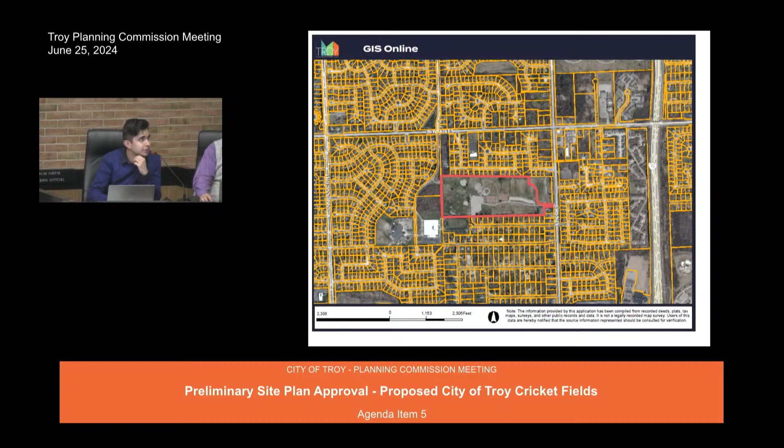All right, so the project is a proposed cricket field in the northwest corner of Boulan Park. As cited before, it's a 47-acre site, zoned CF Community Facilities, which is permitted by right for public parks.

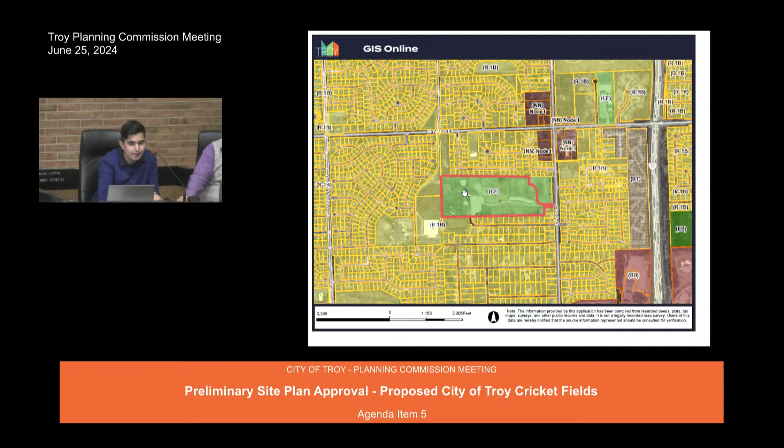The project includes replacing existing ball fields, a new steel storage shed, team benches, upgraded conduits, irrigation piping, approach sidewalks, and parking lot improvements within the Northfield Parkway, which is just outside the boundary of the park to the northwest, along with a hot mix asphalt 8-foot walking path on an existing gravel path, 10-foot offset from the proposed cricket field.

Which is, if you go to the next slide, yeah. So you can see there's an existing path that encircles the entire park, but there's going to be a separate walking path, shown on the next slide, that is 10-foot offset from the actual 500-foot diameter field.

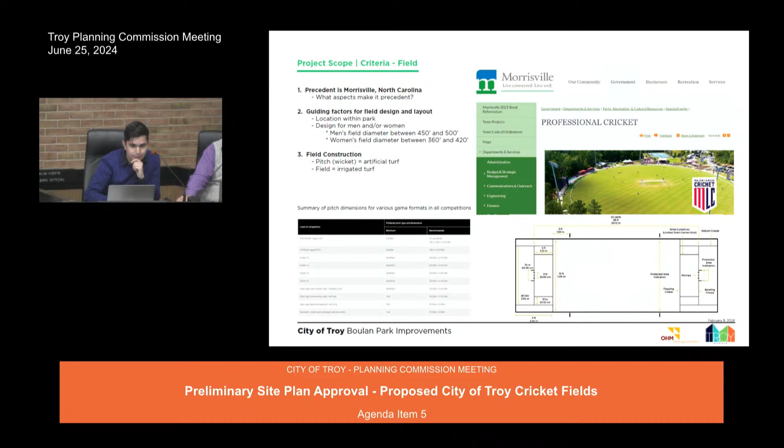There's proposed improvements to the existing utilities to expand on the amenities for this site in the future, including signage, scoreboards, spectator seating, netting, practice pitches, lighting, and broadcasting.

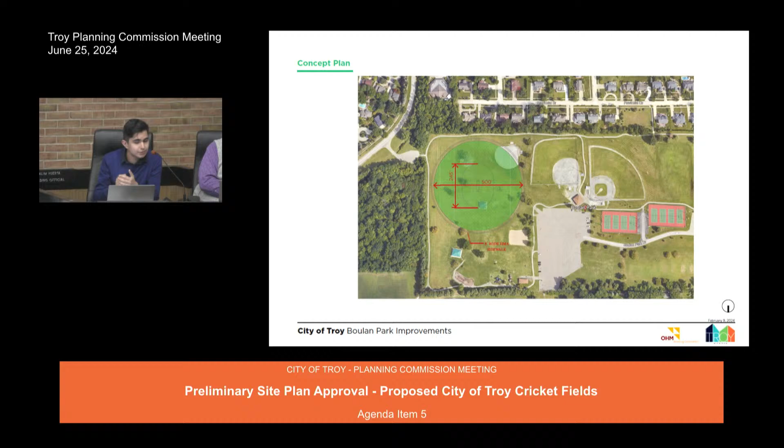And there's an existing pavilion, grill, and water fountain at the south end—if you see that blue square within the green circle—that's going to be relocated. We don't know the proposed relocation site for those facilities. The existing visitor parking within the site is to remain unchanged, but as stated earlier, the approach sidewalk will be connected to the field.

City staff has obtained funding for this project, a $900,000 grant included in the State of Michigan's budget, and city staff has done everything to begin receiving that funding.

This project received input from the Cricket community as well as the advisory board through the Public Works Department, and has been modeled off of a reference field from Morrisville, North Carolina, to ensure that it's certified through the International Cricket Council and can host international tournaments.

The proposed plans that are part of the presentation were a preliminary design by OHM and offer some more details in terms of soil erosion, design of the turf, which is going to be a hybrid pitch, and the improvements to the utilities for future amenity expansion.

Thank you. Does anyone have any questions for JR? Ms. Malalahalli? Brent or Salim, can you tell me what I see at the bottom of the slide here? What are those? I see a brown rectangle, and I see something to the left. What are those, do you know?

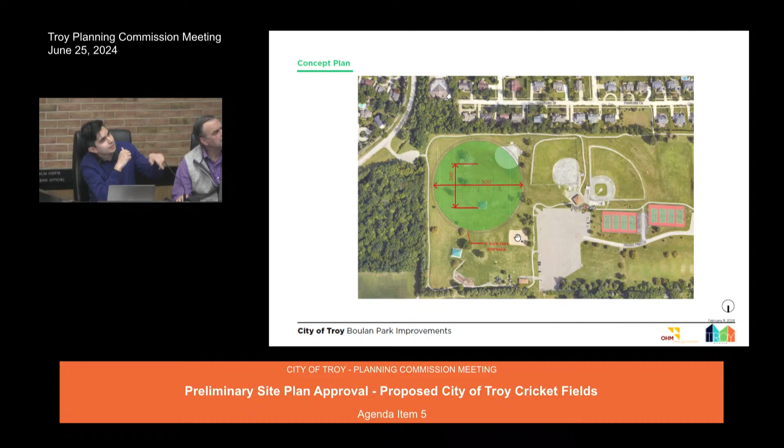You mean at the bottom west end of the existing parking, bottom center? Is it a gray rectangle or brown rectangle? That's the sand volleyball. Below that? Those are restrooms, okay.

My second question is, of course, we don't know where the pavilions are going to be relocated, that for sure. But in terms of the existing parking lot, how many cars does it hold, do we know?

Good evening, commissioners. The parking lot has about, I think, approximately 240 parking spots currently out there. We do have the ability to open up some overflow parking on the grass, and we just recently did that for a Touch a Truck event. So it's not uncommon when there's multiple events going on in the park that we have staff who actually direct and help people park on the lawn area, where we're used to doing that for trainings.

Because I know there is a proposal to also increase the parking lot on the gravel area. Correct, part of the preliminary site plan includes the improvement of the gravel parking lot off of Northfield Parkway. However, that is not going to be constructed at the same time as the cricket pitch. We don't believe the funding's there for that, so we'll look at doing that with capital dollars down the road. But since we're bringing the project before you, we wanted to at least include the parking lot for a future date, hopefully constructed when funds become available.

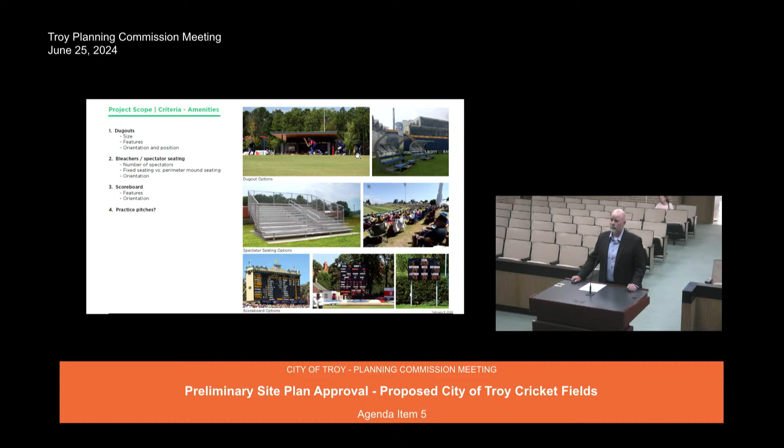Go ahead, Mr. Buechner. Can you speak to the $900,000? What does that include or not include? Sure. Our state representative, Sharon MacDonell, was able to get the state budget appropriations committee to appropriate $900,000 to a cricket field.

That's all the requirements. Interestingly, we don't have to go through any environmental study. It's not federal funding, it's state funding, so there's not a lot of strings attached, so to speak.

That $900,000 is paying for the current design efforts through OHM. And then we'll have approximately $650,000 to $700,000 after all those fees are paid to put towards construction.

We are very conscious, especially engaging the cricket community, having a youth coach on the committee through the design process along with an adult player, that sometimes we had to rein them in a little bit. We would love to irrigate the entire field, but it's not in the budget, so the inner circle is the only thing being irrigated.

They would love to have lights. It's not in the budget. However, these can all be added at a later time. So we're really trying to produce a product that is close to that available funding as possible, not using city capital funds to subsidize any of it.

Gotcha, cool, couple other questions. So parking, 240, is that enough? Typically, again, losing the shelter and going down to one shelter right now, those hold 250 guests themselves, so going down to one shelter will help. Taking away one baseball field will help too.

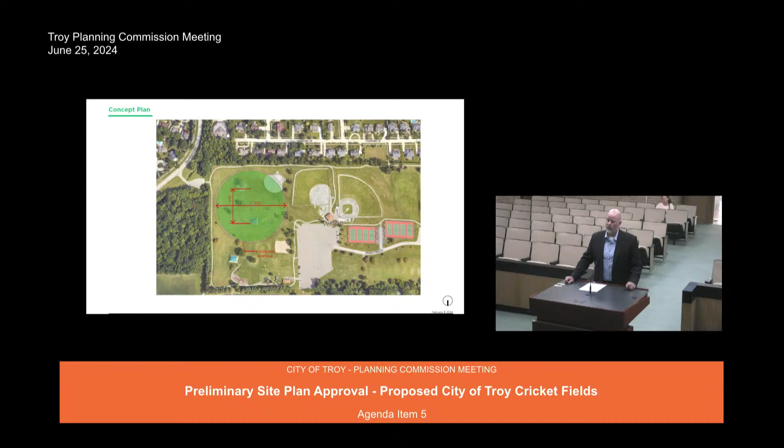So that area, that elliptical 240-foot area, is the inner circle. That area is what's going to be irrigated. The pitch is what's directly in the middle, and that's going to be the hybrid area. I think we're only going to be maybe the third in the country to have this style of clay combined with synthetic turf. I actually have to purchase a very specific type of roller to be able to maintain it. So that's the area that's going to be the synthetic or hybrid, the pitch itself.

So let me ask, while we're talking about this: that 240-foot oblong circle is going to be natural grass, that's irrigated, with a sprinkler system? That is correct. And the outside, up to 500 feet out, is that natural grass that's not irrigated? Correct. Because right now Boulan Park is not irrigated? It is. The baseball field that we're replacing is not irrigated, but the other two baseball fields are irrigated, and the soccer fields are irrigated as well.

Right, but what about the area above the playground, north of the playground and the pavilion area? Is that not irrigated? That is not irrigated either. Okay, and the current space is not irrigated, so this would be an upgrade? That is correct.

I live walking distance to this park. I'm there multiple times a week, and my family uses everything: tennis, pickleball, soccer, the playground. We go to the concerts, we go to Troy Days, we use the pavilion for all sorts of school events. We're there all the time. So my biggest question is...

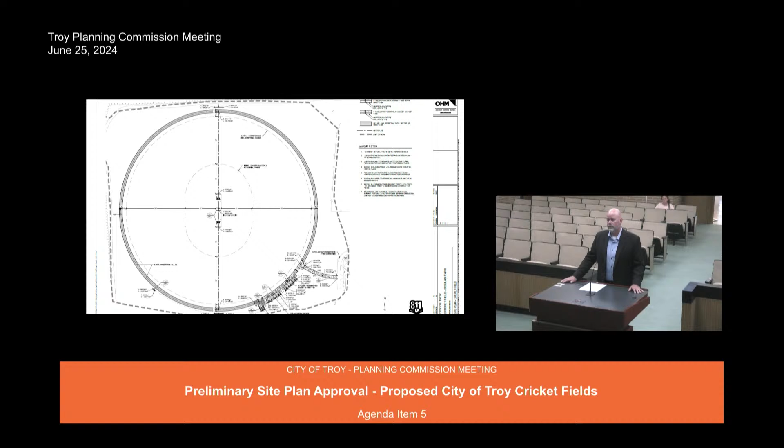Okay, and it actually works out well because there's that path right from the parking lot, so people can walk straight there. In terms of a safety issue, I don't know much about cricket. In terms of the ball, I know it's heavier, but is it oriented a certain way where people walking around the outside path that circles the whole park... I get that we have baseball fields and when there's a game you have to be aware, but how dangerous is it, and are we making it large enough to make sure people aren't going to get hit?

Yep, there can be errant balls, just as in baseball. Some of your adult players will be able to hit it out of that 500-foot radius. Again, that's the idea of the asphalt pathway, to tell people you're entering a new space. A lot of times they'll also put rope on sticks, just if it's an adult game and they want to play extra cautious, to delineate the field and so people recognize you're coming into an area where recreation is being played and you should be cautious.

Okay, I did want to comment on the parking lot. I understand it's not going to be part of this phase, but it looks to me like there's going to be a clearing. Could you go to the one right before real quick? Yeah, okay, so that dark space above the gravel lot is currently trees. So I imagine there'd be a tree inventory done, to make sure what's being cleared out is appropriate and all that? Yes. Okay.

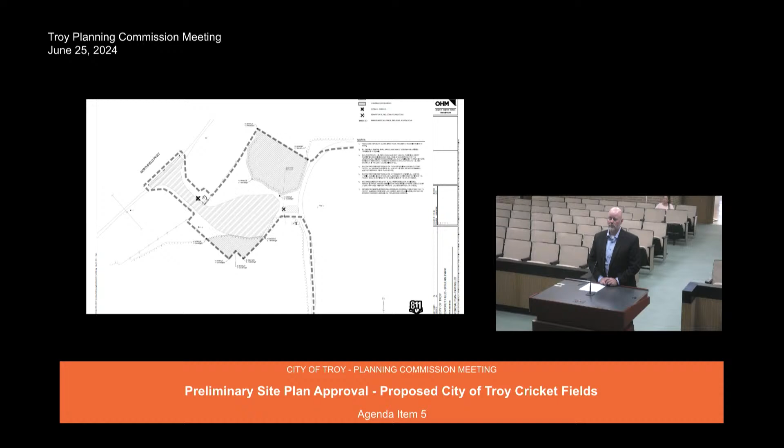And also, right now, as you know, it's a very private drive, that gravel area that comes, and when you're driving by Northfield Parkway, I would imagine many people don't even notice it's there. So I would be careful that we don't just clear out this huge space and you drive by and it's an empty parking lot all the time. Right now there's that chain link fence with green on it, but whatever you do, I would hope it would be done in a way to keep it protected from Northfield Parkway and the neighbors behind.

And then the biggest comment about the parking lot - I don't know if we're approving this plan for the parking lot right now, because if we are, I do want to make sure we mention that the majority of people entering Boulan Park from that west side are pedestrians. They're not driving into that parking lot. Almost everyone walks in with their dog or family or bike or whatever.

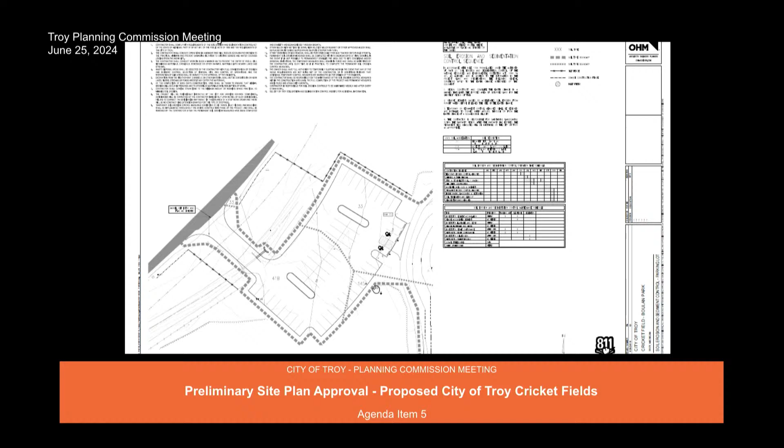So the plan, JR, could you go to the next slide real quick? The plan that is being proposed provides no pedestrian path whatsoever. We don't want people walking into a parking lot to come into the park. There has to be - and I imagine it would make most sense, it's kind of a weird angle - but on that southern side, a nice 8-foot path that would invite pedestrians to come in, because right now they're just walking in that gravel. It would be nice to have a proper pedestrian pathway, and you've got to have one.

Great suggestion, and if I may, I would also consider - since there's no sidewalk on what would be the east side of Northfield Parkway there - a signed crosswalk to the west side that would allow people to cross, and signal it appropriately. So that's a great improvement suggestion that we didn't think of for pedestrian access, the current pedestrian access using that area now. Thank you. Yeah, for sure. And that would be a great improvement, actually, for people in that neighborhood to get to Boulan Park. Okay.

Just let me glance at my notes. There is no sidewalk on that side then? Correct, there is no sidewalk. Yep.

And that parking lot - I counted 52 spots. I didn't know if it was going to be for the players, or handicap/disability parking, or is it just overflow parking? The intent was overflow parking. Originally when we designed this parking lot, the players' benches were a little further north. We didn't know how we were going to connect with a pathway to the existing larger parking lot. So I really see this as overflow parking, because the most convenient way to enter the field would be off the larger parking lot. Yeah. Okay.

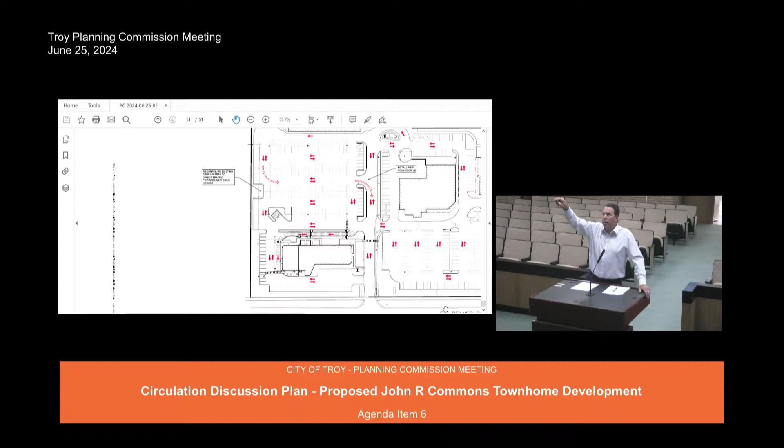And you are talking of a walkway, and there is a walkway currently here to get to the ice arena. There's a crossing we're putting here, and this goes to Big Beaver as well. So that walkway is there. There might need to be some sort of marking up there to get them there, but that walkway is there, all along there. Yeah, very narrow on landscaped sidewalk, but yeah.

Well, I mean, there's landscaping here, and then there's a walkway there. So that connection that you were looking for between the ice arena and these centers, it can't occur because we're putting this connection there that we're installing, which doesn't exist. Are there any trees there in this? I honestly don't know, to be honest with you. So when you say, I can look at it. Landscaping, there might be a strip of grass? It's grass, it's a strip of grass, yeah.

Okay, does anyone else? Yep, Mr. Buechner. North of Starbucks, that curb right there? Yeah. What's the width? That is 8 feet. 8 feet? So what we did, we put some ground cover in there and some landscaping.

I like that. Coming off of Big Beaver, making the turn, you want to go into the Starbucks, you got to make that weird U there? Is that a tricky turn? Not necessarily. We've got this, cars coming from the west towards the east, you got to make that turn. Is that a safe turn? Yeah. If you look at University and Squirrel, the northwest corner, we have this exact situation.

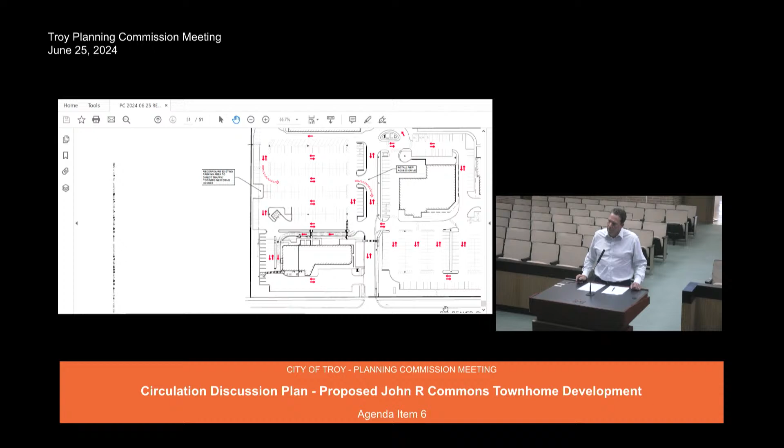Ms. Malalahalli. Brent, if you don't mind, can you put up those PowerPoint slides that I sent? I'm more of a visual person, so when I went and saw the parking lot there - I was not at the previous meeting, but I did watch the video - there were a couple things I did not get a complete understanding of, so I'm going to ask you those questions. They may have already been asked, but just bear with me here.

One, I just want to know why the trash is being relocated. What's the reason for the current location - is it not favorable for your Starbucks? It's not favorable, it's in the drive aisle where we would have the Starbucks, because we're taking out that parking. So we want to just have a central corral for the trash for all those uses in the retail center.

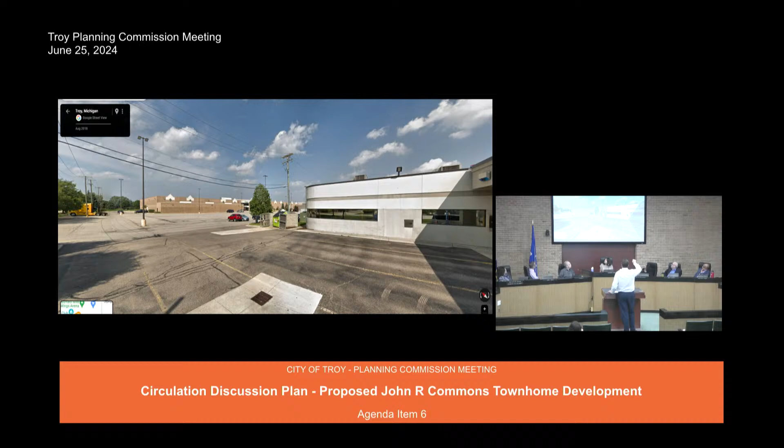On the next slide, I think I have the picture of where you potentially are planning on locating the dumpster. Is it closer to that light pole that I see? It's there, in this kind of area, yes. In that area, okay. So, I know you're not compliant in terms of trees - there was talk about peripheral trees. We will be.

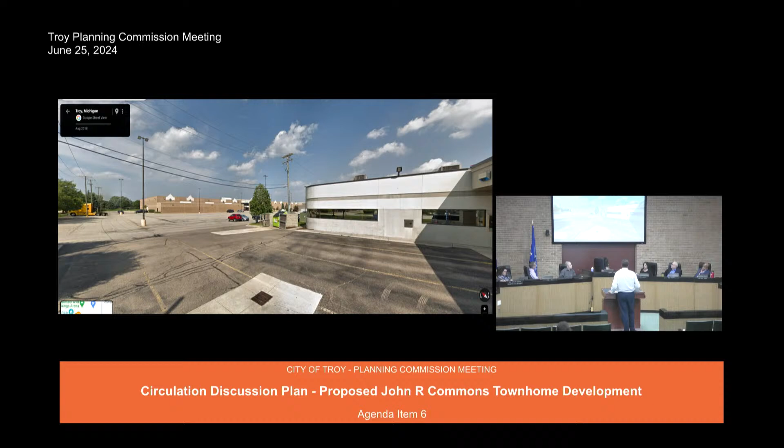Since you have enough parking in that area, Brent, if you don't mind going to the next slide - what I was thinking about is, this is the strip of parking lot where your dumpster is potentially going to be sitting, towards the end of this corner. Right there? Yep. Is this an area where we can have some kind of row of trees, wherein this becomes a clear delineation of the proposed drive that people can take, so that there will be better circulation, and also a clear separation for having some more trees and Starbucks right next to it?

Yeah, I mean, the dumpster area will be landscaped. We're putting an island in there, we're gonna landscape that with trees. That bump out island is essentially up in - there's that drive here, so that bump out island is gonna be in there, and these will be converted to parking spaces. So the island's going to extend out about like there. So there is going to be no car movement coming this way, it's all going to get redirected. Can we go back to the circulation plan?

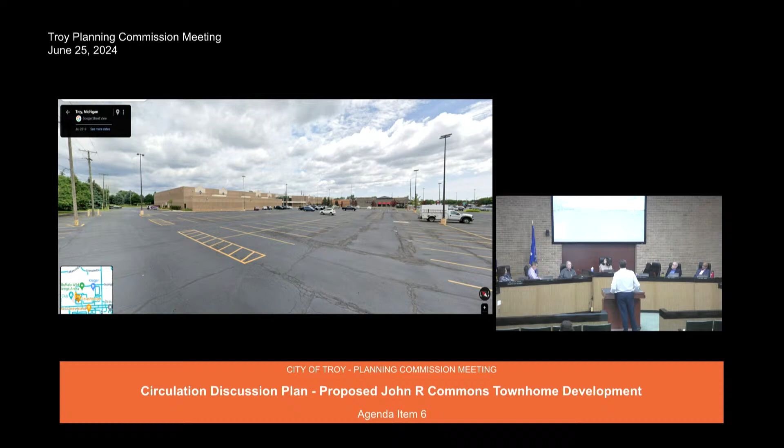I thought I saw some double arrows right next to the dumpster, correct me if I'm wrong. Yes, there are double arrows there, so traffic can circulate in this fashion. This is intended to channelize people in this direction. If cars aren't parked there, would people go through there? Sure, but the intent is to have them go in this direction.

I still am not happy with your dumpster location, it feels so off on the parking lot. Aren't your folks going to be crossing? How are they going to get the trash out? Where's the closest door from the Starbucks to the trash? There's a pathway through here to go out this way, that's the intent. They'd come out here and go into the dumpster, so anyone here could take their trash and go here.

So your double arrows to the left of the drive-through lane are confusing for me, and so is the double arrow right next to the dumpster. If you are focusing traffic to go where your arrows are sitting, there should be no double arrows on this side at all—only the drive-through lane should have one single arrow coming down toward Big Beaver. I'm a little confused as to why you have double arrows going there.

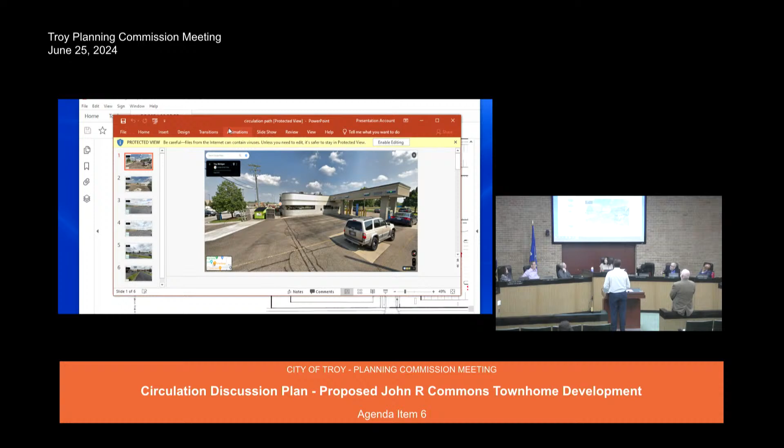This is in reference to the proposed circulation pathway, the cut you're going to be making on the existing driveway, the northerly access drive. Let's get to that slide, because I prefer showing the location. Please keep going, Mr. Savidan.

No, there are trees here, on both sides, I saw that. And you're gonna obviously cut this in order to provide for that circulation to happen. Yes. How many trees are we going to be losing here?

We'll just transplant it. If the tree's in the way, we'll transplant it.

Okay, so I just want to make sure that as we talk about compliance of the trees, since these are also potentially maybe 1, 2, I don't know how many we may lose. There's 7 on that side. I just want to make sure that those are also kept into consideration when we're talking about becoming more deficient in trees. I know we're talking only about the Starbucks side, but in general, we don't want to lose more trees in this area when the parking lot is already deficient of green.

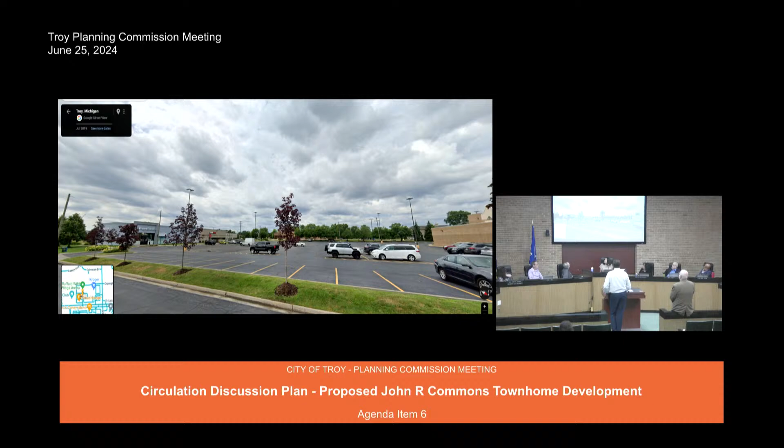If they're in conflict, we'll find a place to put them on that island. Okay, and I think there's another, the next slide also has the same thing. So this is what I wanted. I knew there were trees on either side, but see how deficient they are.

Is this correct spacing between trees? Because I think there could be another tree in the middle too, right? But anyways, what I meant to say is basically, I don't want to lose this space to become so much more barren because it's so dry right now. And if we can add any more green and not lose too many trees, that's the direction I want you to take.

We will be adding, by the nature of the way the configuration of the drive works, 2 more landscape islands that'll be there, because you have those hooked islands as it comes in.

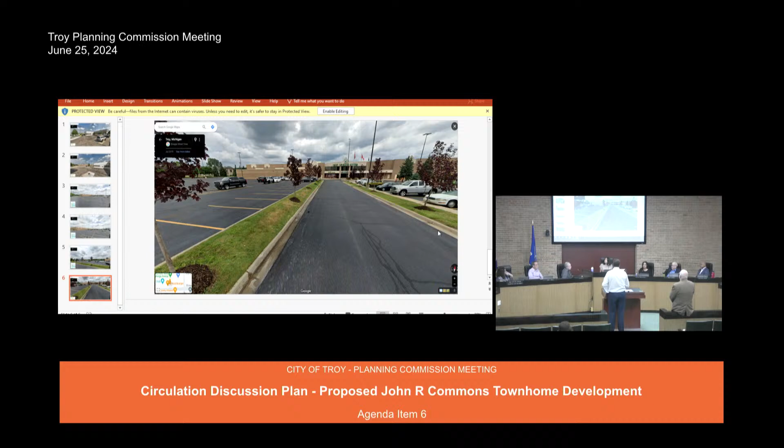Thank you, Mr. Savidant. And that bump island that we're talking about, which you plan also on extending, approximately what's the size of it going to be and how many trees can you put in there?

So, as you can see, we're going to be adding 2 islands where the drive-through will cut through the main. Okay, I got the pointer, why don't I use it, make it a lot easier. So this island and this island, those will be new, okay? If there's any trees, they'll get placed in there or get transplanted somewhere along that same island, so we won't have a lesser tree count there.

So you're talking about this island? Yes, that island, and I'm also talking about the bump out that you're proposing to also extend. Up to the left, the top left, right there. You're going to have some trees there? Well, you got to keep in mind, we do have a power line there. But if we push this out a little bit, it might give us that opportunity to put some trees in there.

Let's put some, if you can, some shorter trees, if possible. Yeah, we don't want them, obviously, to come in and get chopped down. Like our friends at DTE do. No, that I understand, yes.

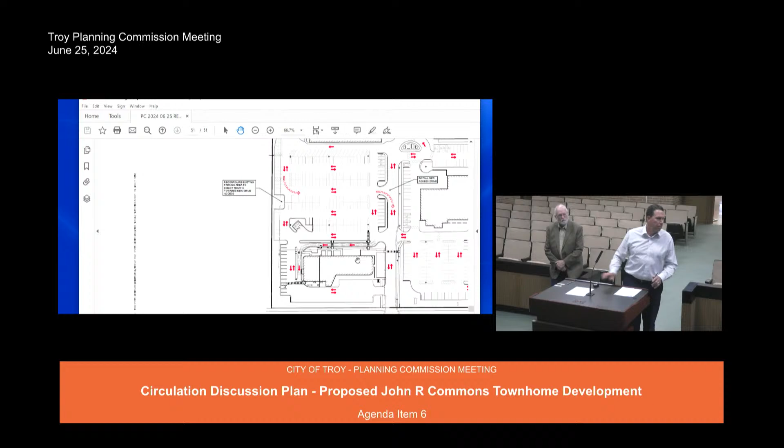All right, I think it was helpful. Yeah, hopefully it was helpful for you. Yes, thank you, appreciate your feedback.

I'm going to turn it back really quick to discussion, because I know we had some strong opinions on some of the changes. I think overall, from what I heard, people like the bump out idea and sending traffic perhaps with an exit sign to the east to get them out onto that middle aisle drive so they can get to Big Beaver. I'm just curious what other people think about closing the entrance right north of the drive-through, or if people think our consensus would be to actually close that and have it only be for the one-way traffic into the drive-through.

Do people... because we could send a message to them so when they come back, we've kind of given them our opinion on it, because this is sort of what this is for. Does that impact the trash pickup if you close that off? Whether the trash guy can go up and turn around. How many turns is he going to make? He's got to make multiple turns anyways. He goes further up and then comes back down. Right.